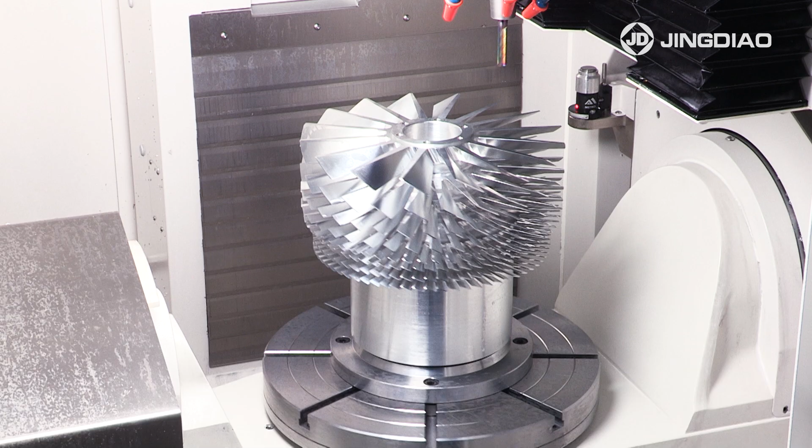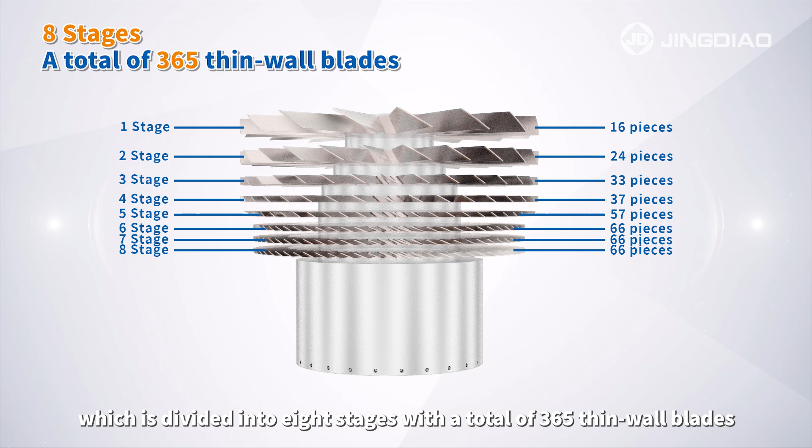This is a turbomolecular pump impeller, which is divided into 8 stages with a total of 365 thin wall blades. All blades are free-form surfaces, and the ratio of blade height to thickness is greater than 38:1.

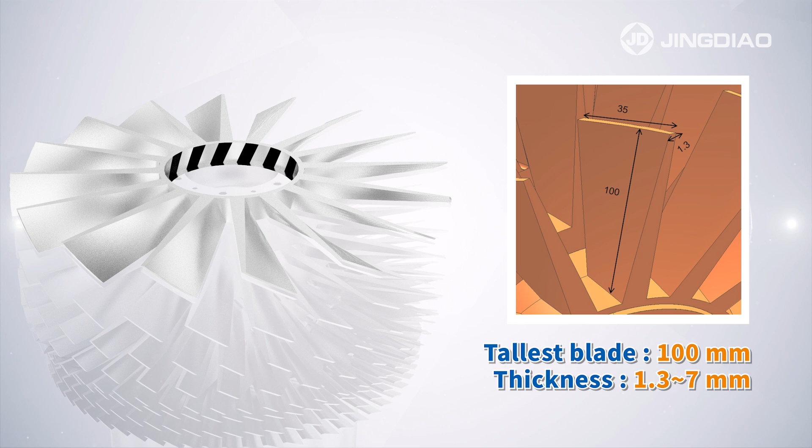The key to machining such spatially complex parts lies in developing a safe 5-axis machining process. Jingdiao introduces a new mode of 5-axis process development, utilizing the DT programming technology of Jingdiao CAM software. It efficiently completes the 5-axis machining process, reducing the development cycle from 60 days to 14 days.

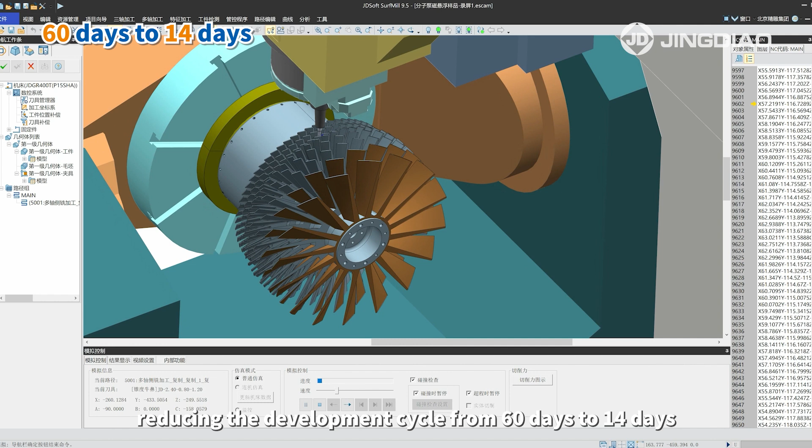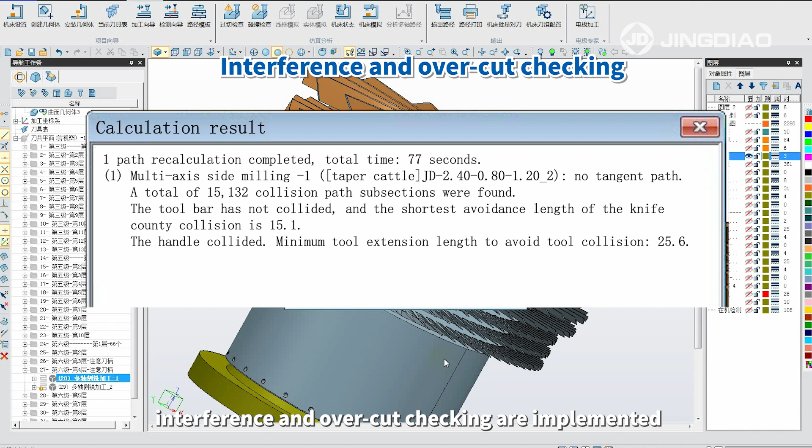The specific steps of this solution are as follows. Establish a virtual machining environment in SurfMill software that mirrors the actual machining environment and conduct 5-axis process development. Subsequently, complete simulation and virtual machining. In the software, interference and overcut checking are implemented based on the inspection result. Perform process optimization and conduct another round of simulation and virtual machining to output a safe and reliable 5-axis machining process.

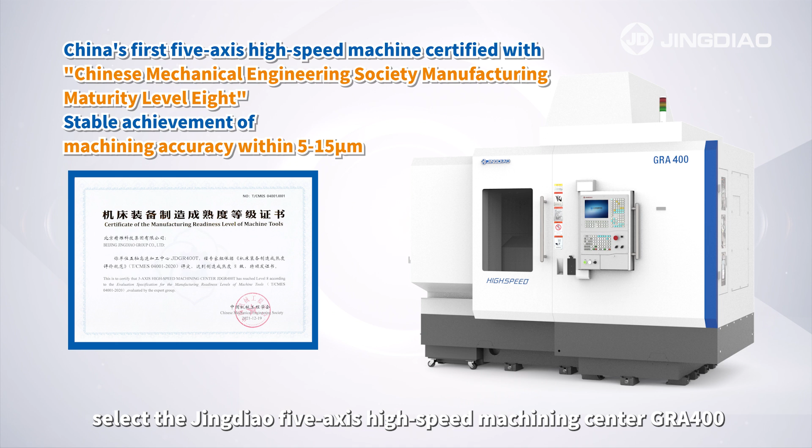Simultaneously, select the Jingdiao 5-axis high-speed machining center GRA400, utilizing 5-axis coordinated machining. This allows for one-time clamping to complete all feature machining on the equipment, with support for continuous stable processing of tools with a length-to-diameter ratio of up to 16:1 for 8 hours.

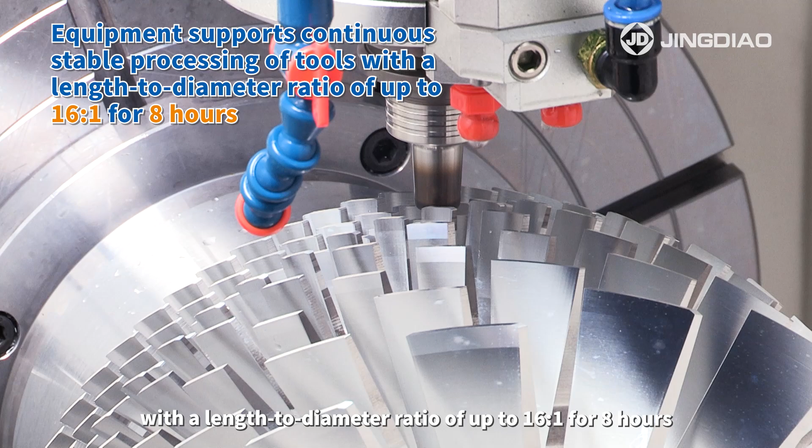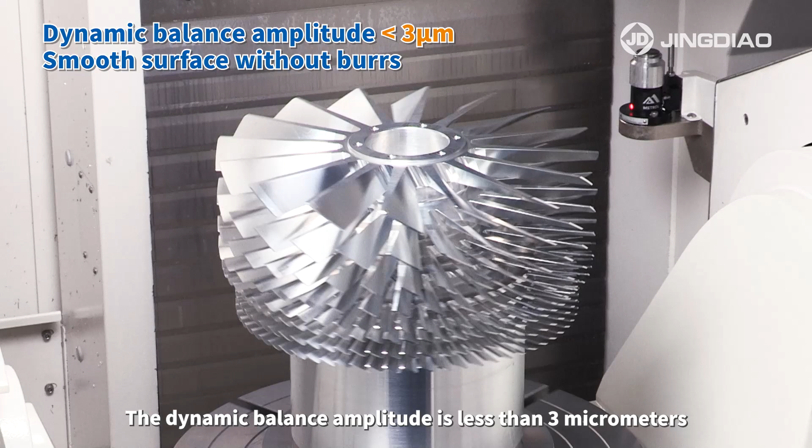Ultimately, achieve precise machining of all features of the turbomolecular pump impeller. The dynamic balance amplitude is less than 3 micrometers, and the surface is smooth without any burrs.

Next, let's take a look at the enchanting allure of GRA400 as it makes the tools dance among the 365 blades.